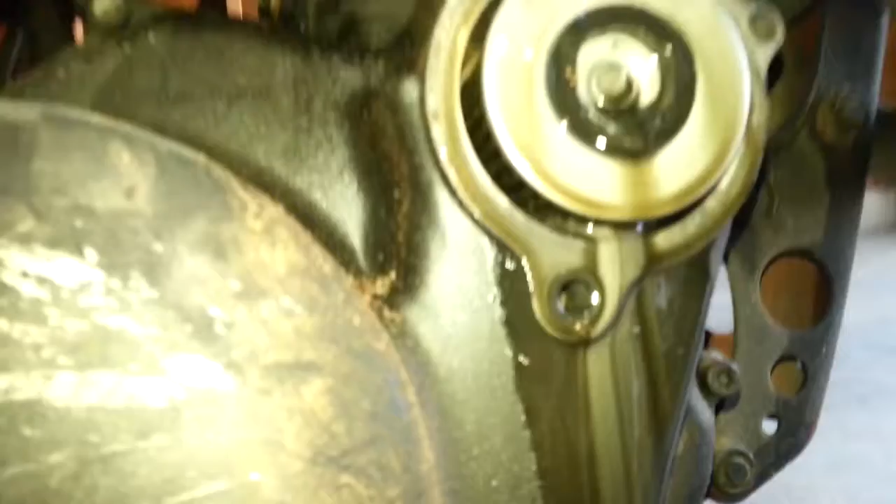Wow, look at this oil. That looks bad. Is that a whole bunch of metal? Looks terrible though.

What is that? Oh, it's probably clutch material because it's actually a wet clutch pack. So if you look at that metal on there, yeah, that's wet oil, that's from the clutch. Wow, so this oil has a job of keeping back all the clutch material out of the engine. Or the clutch material is designed to get in the engine. I don't know. Hey, you motorcycle owners out there know? I'd love to know, because I sure don't.

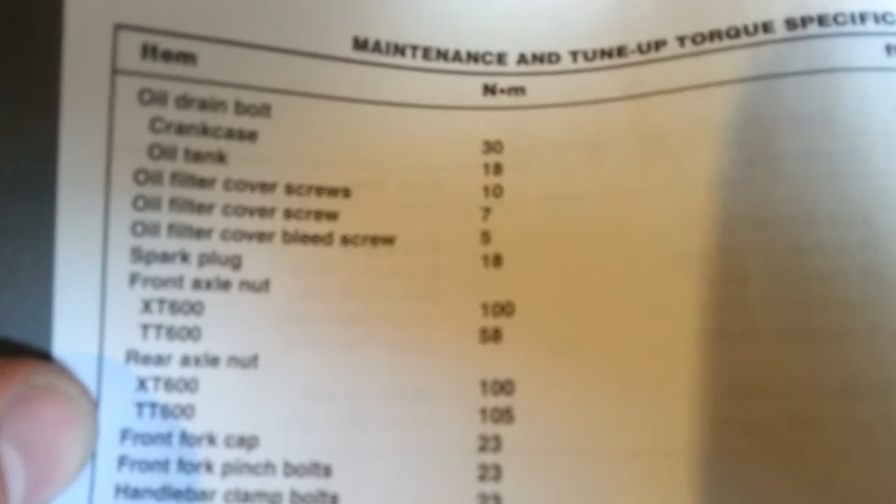Thanks. Well, this is incredibly helpful. Oil drain bolt, 22 foot-pounds. Oil filter cover screws, 7.2 foot-pounds.

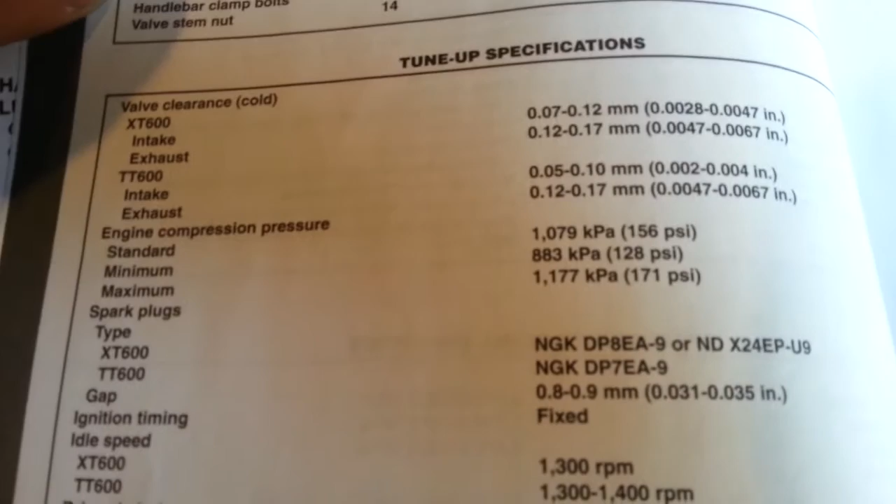There you go, that's a clear shot. That's very helpful on my XT600. Compression's supposed to be 156, minimum is 128 and maximum is 171. With this old carburetor, I wonder if it carbons up more, so the compression actually can get too high and you have to take it apart and clean it up.

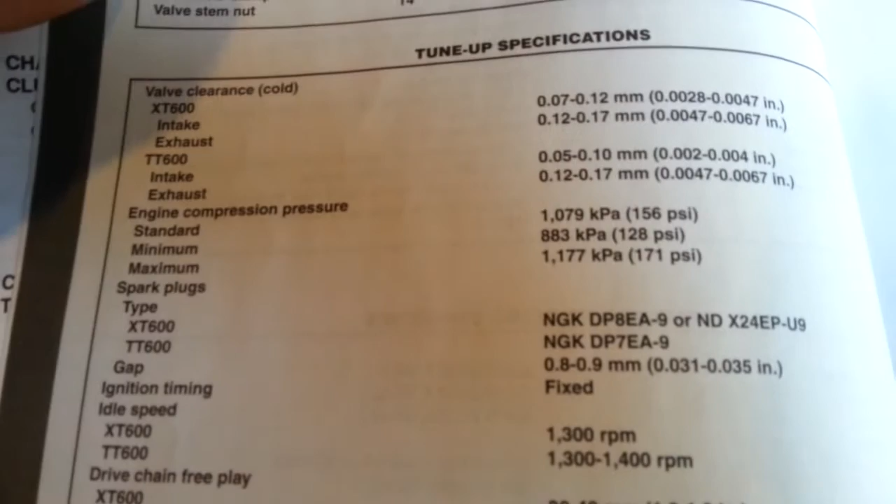Idle speed should be 1300 RPMs. I'm trying to figure out where the oil drain screw is. Looking on the bike might be faster than reading the whole manual because it's interesting.

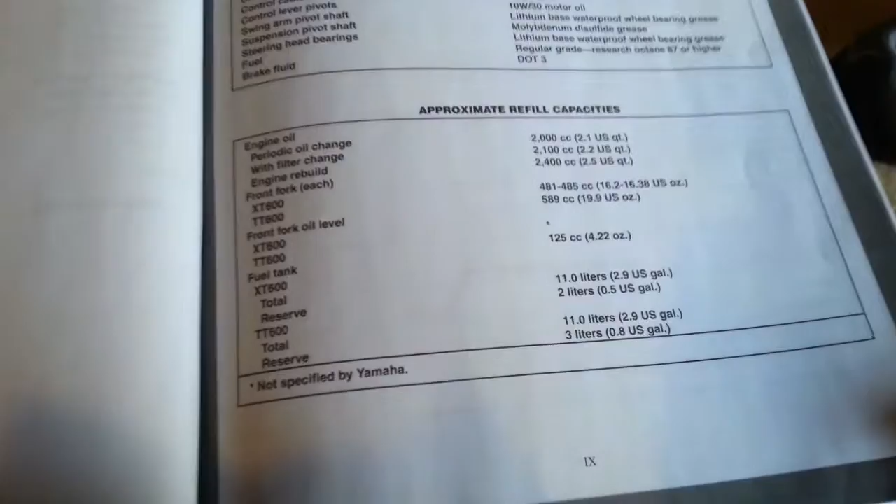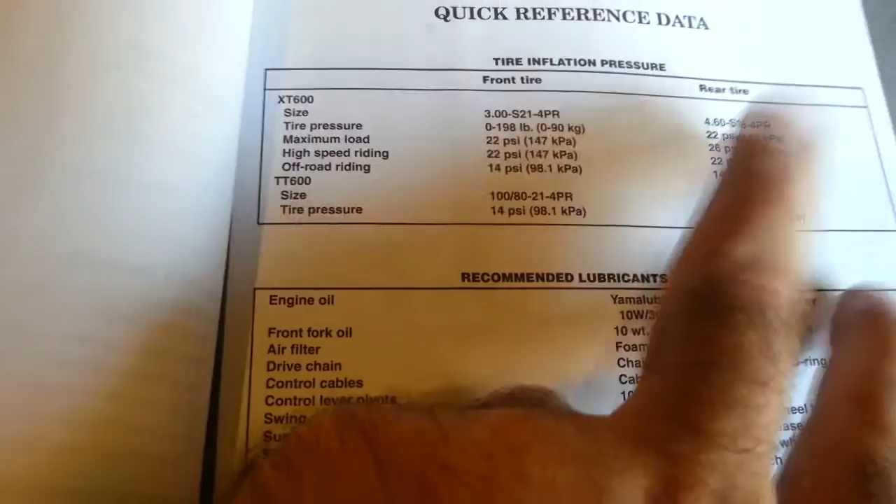Oh, this is helpful, I didn't know this. Rear tire pressure is supposed to be 22. Oh, I'm way above that, I need to drop that down. I did what the tire was rated at max. I know that was the wrong answer, but it was a place to start to let some air out since I don't have my air compressor, if you look.

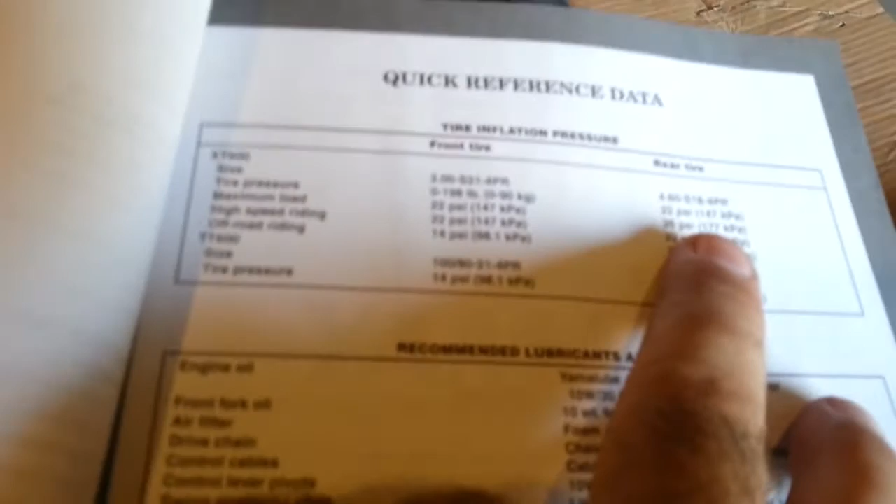High speed riding is 22. Off-road, they recommend 14. So I guess 14, since I'm just off-roading.

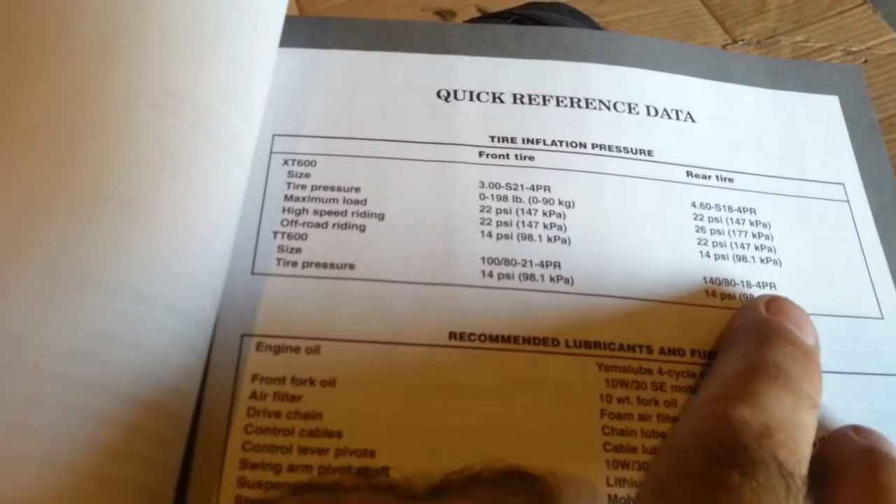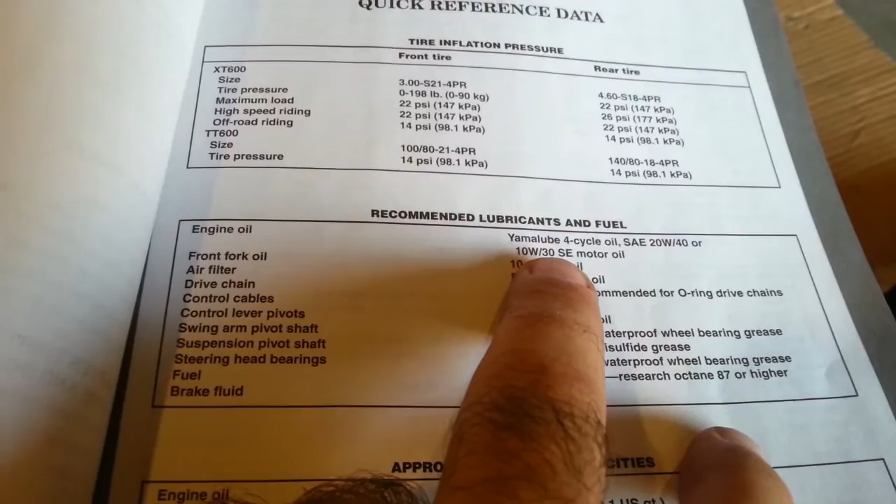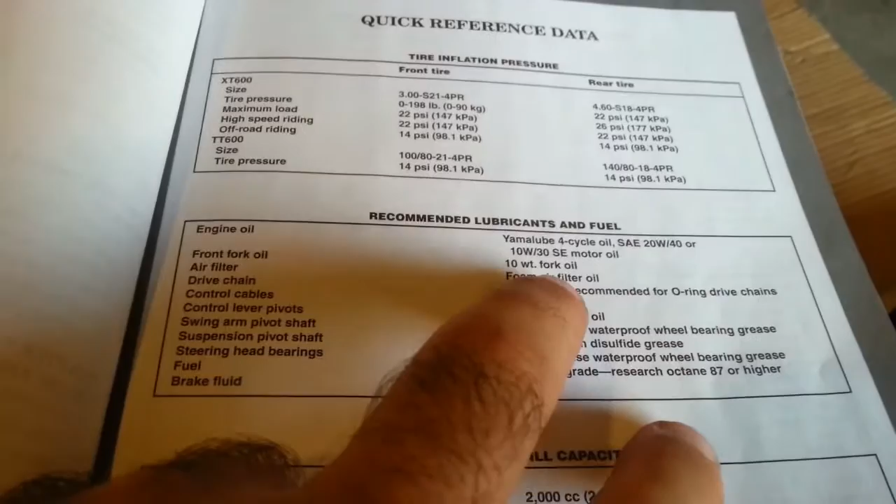And they actually recommend 20-40 or 10-30. I bought 10-40. Well, the engine's pretty used, so I guess that'll keep me safe in the cold and in the hot, because that trail I did yesterday was first gear the whole time and it got pretty hot, and the oil, check the oil, is really thin. Fork oil is just plain 10 weight.

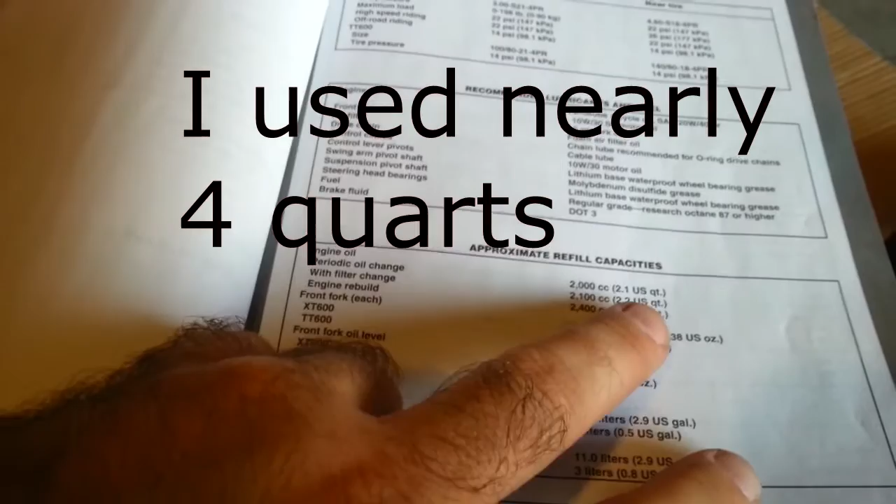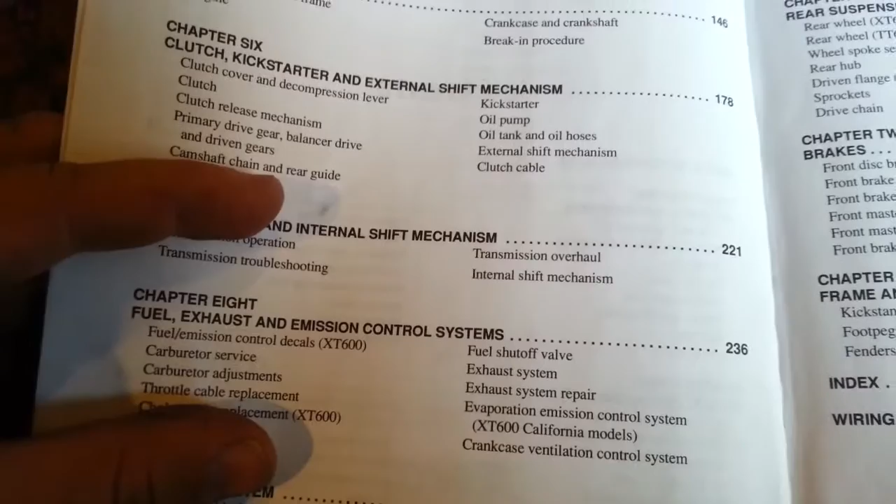Oil change should be 2.1 quarts. I bought 3, so I should be good there. Clutch kickstarter, if I read up on that, that might help. I suck. Hoping changing the oil makes it easier to turn over, because it looks pretty thin with all that fuel in it. That's just a fact of life

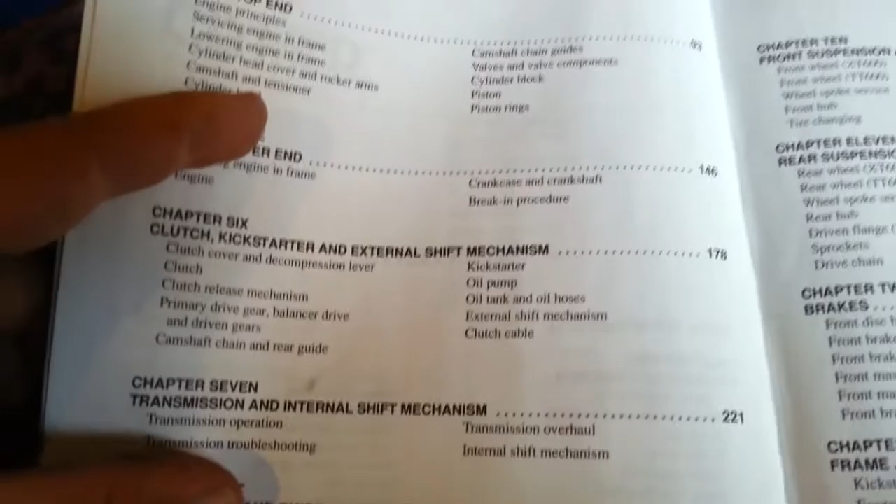with a carburetor. They even explain basic tools in here, so this is actually really to start you from nowhere. Lubricants, page 40, and maintenance and tune-up.

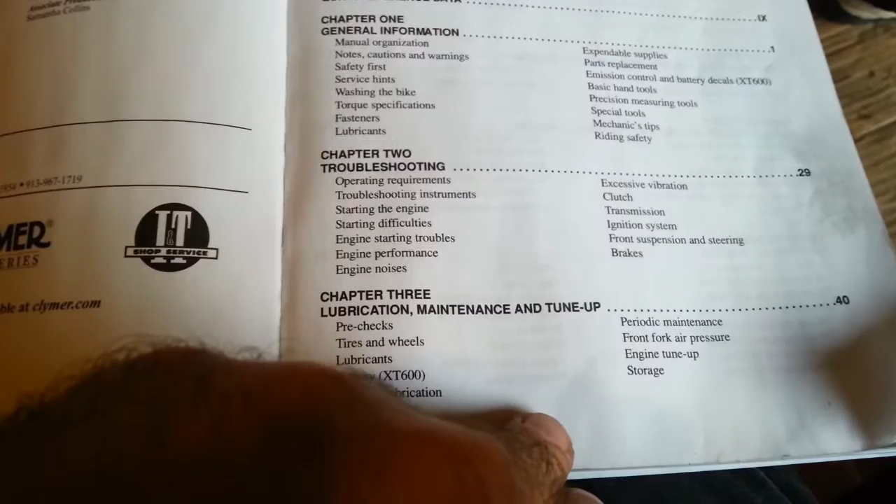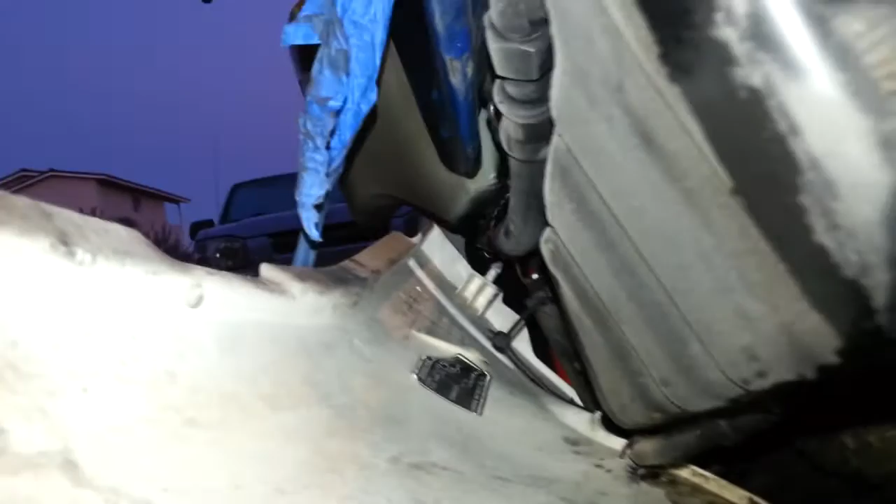Maybe that'll have it. Alright, so the oil that came out was super sludgy. Apologize, I didn't record that. It kind of tells the story better to see how nasty it is, but it was super crazy nasty. You have no idea.

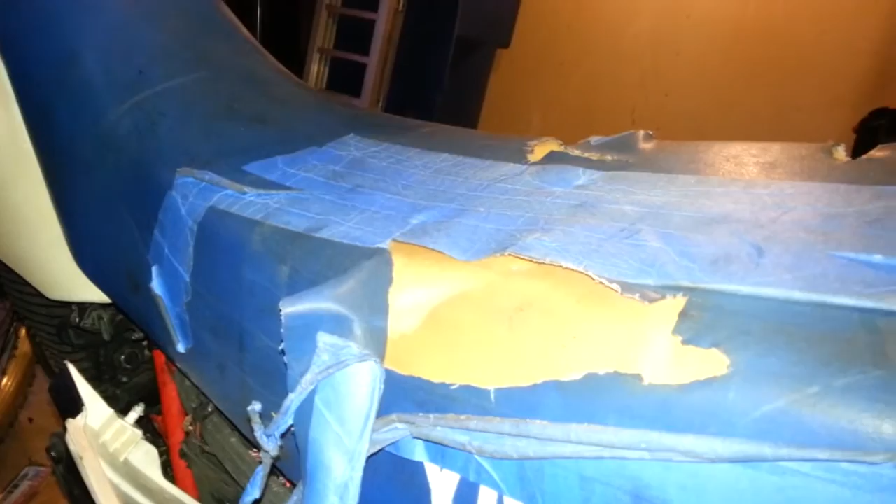I'm seeing all kinds of labeling underneath here I never noticed before. Also, as I rode, the seat was tearing and tearing, and that made me feel like crap yesterday. But this oil, I think you can tell, even if it remains, is total sludge.

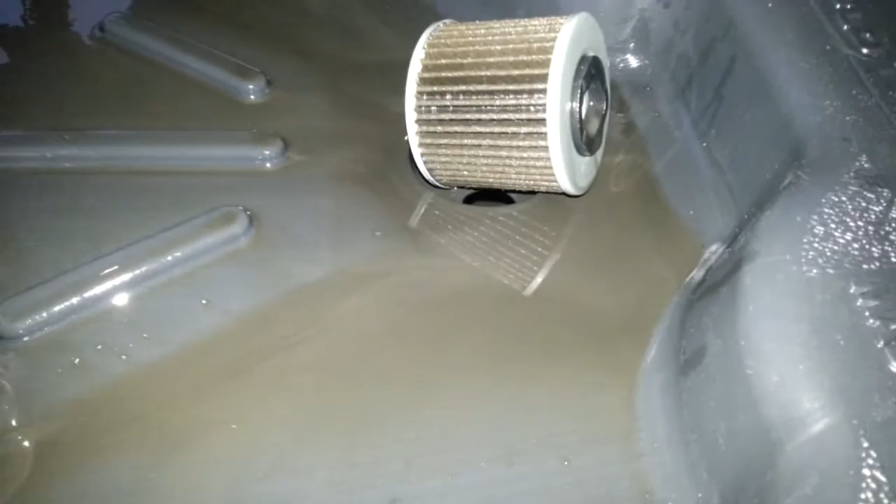Changing this oil was a challenge. I thought I changed it. I started pouring oil in, I was like, whoa, whoa, whoa, whoa, oil's coming back out. There's a drain plug here because of the dry sump pump system, which basically means that it runs...

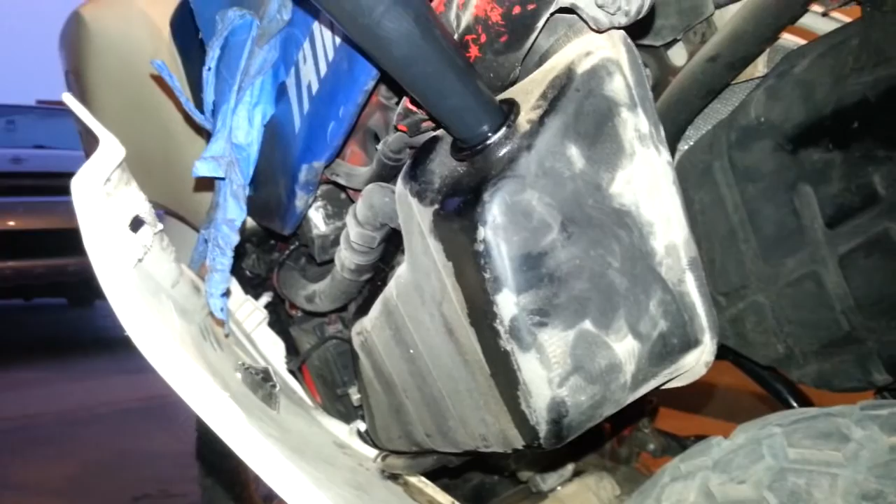It doesn't have an oil pan. It actually draws the oil out of this container up high rather than having it down low, and brings it back and around again.

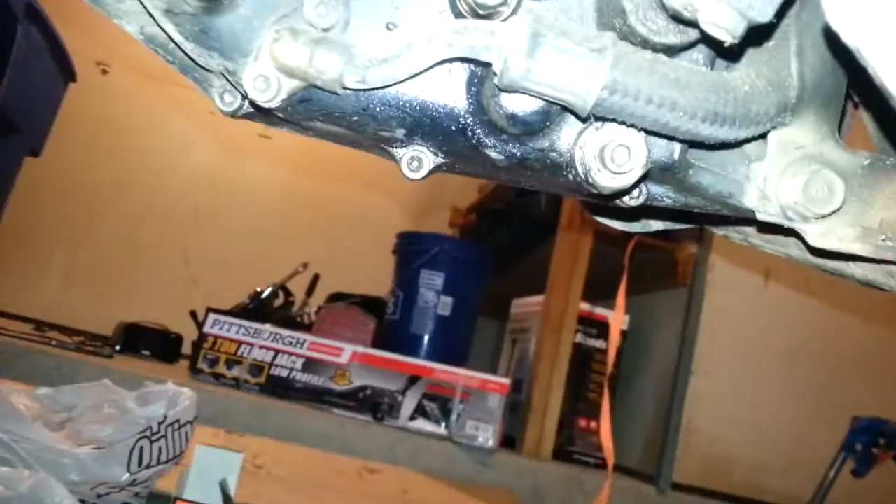And there's also 19 here, the other one's a 12 under the tank. And you also have to... you also have to change the oil filter here.

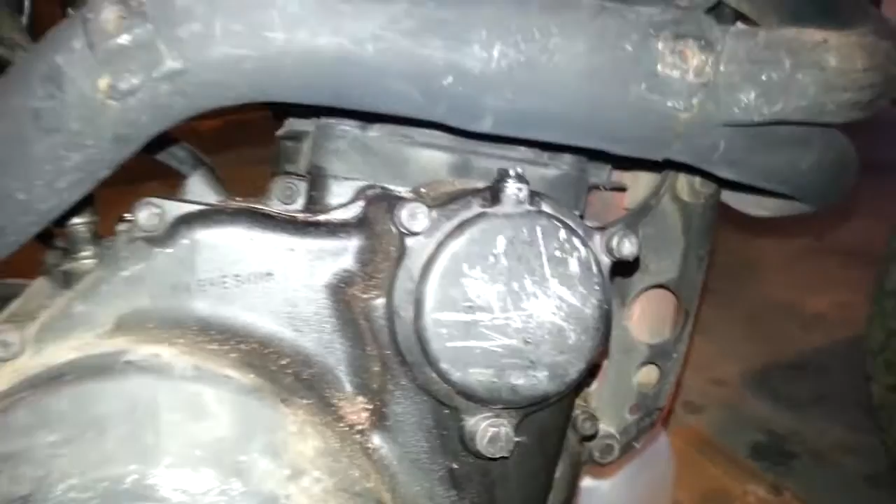Now apparently, I just went ahead and took it off and let it drain. Who cares? But the fancy way to do it is to take off the oil cap, take off this, and watch the old oil drip out. Yuck. I went ahead and just took the whole thing off. It worked fine, and it just belches down here. I'm not sure how much it would achieve to do it the official way and take off the oil and then take this and watch it drain, just to have it drain when you take it apart anyway. So I'd rather save the time.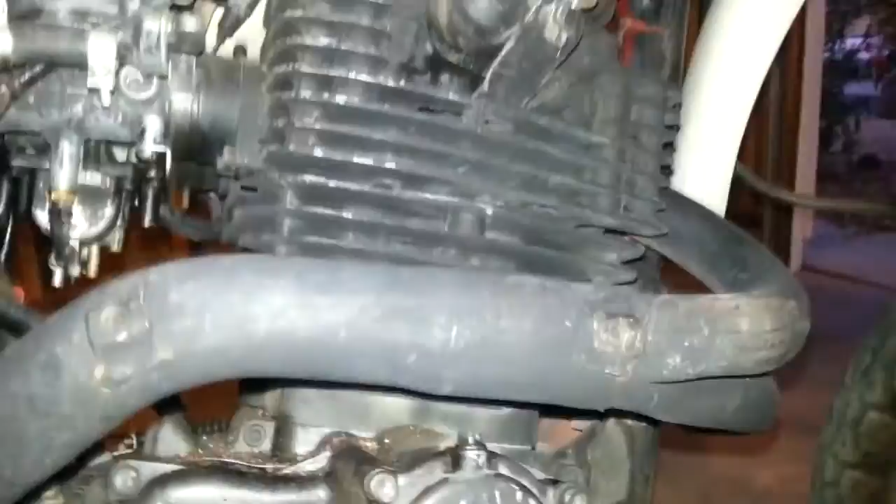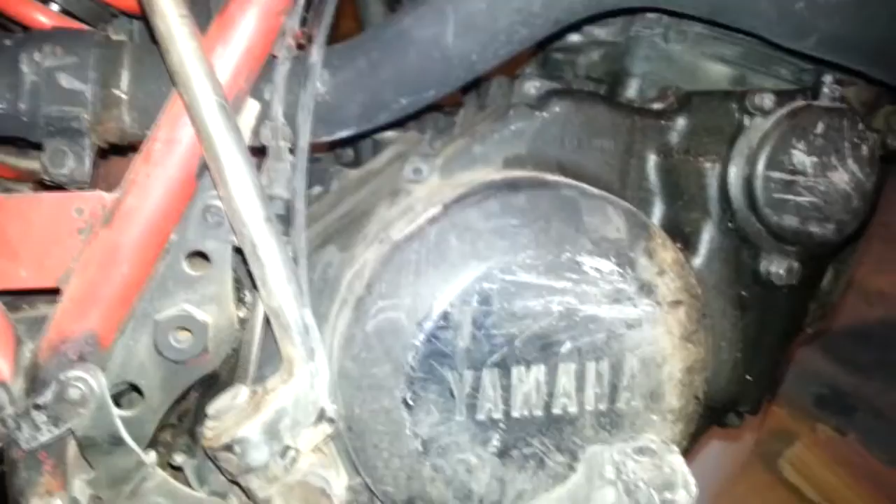I mean, it's just a filthy bike, who cares? If it gets some oil on the side of it, so what? I might care more when I clean it up. Right now my boots are wearing his crappy oil, his crappy paint off of everything. And I apologize if I just should have recorded this later when my neighbors weren't talking, because I can barely hear myself think.

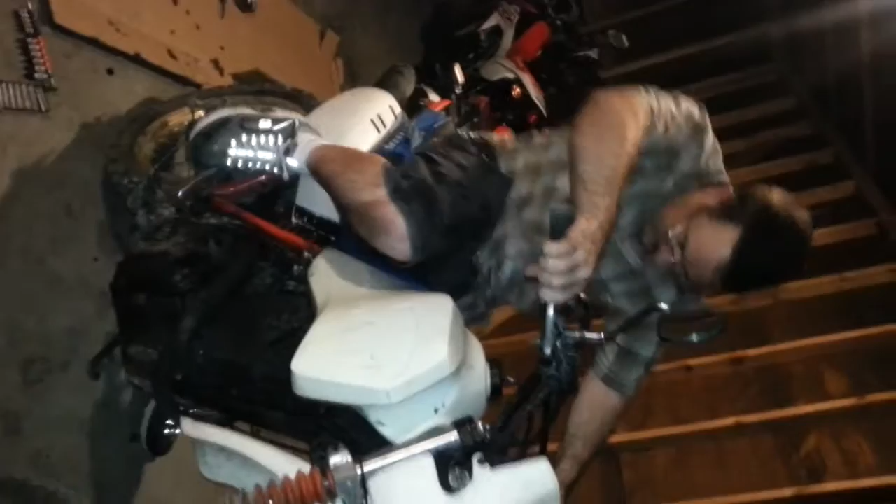Now, look what happens, easy. Gotta get it back out of gear. Neutral. Probably in gear. Out of gear? Okay. You get it. Do it exactly what you did again.